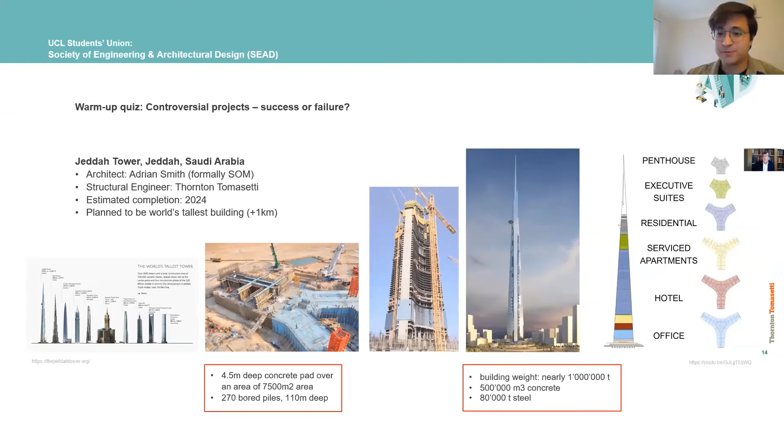Jose, do you want to add anything before we proceed? No, not much. I think everybody has expressed themselves, and I'm only going to throw more petrol into the fire if I keep talking.

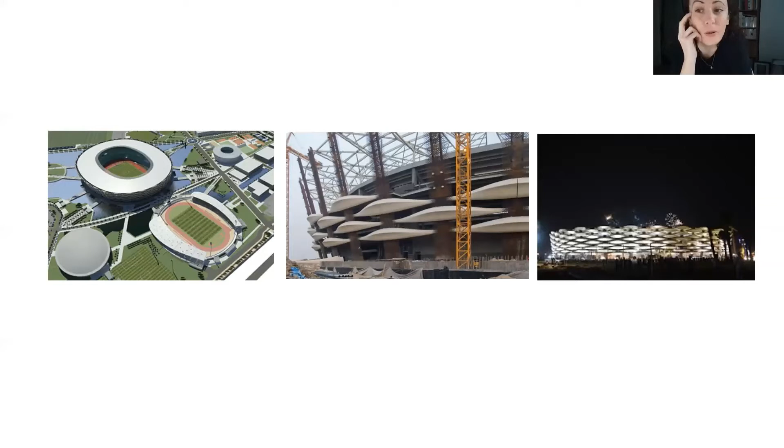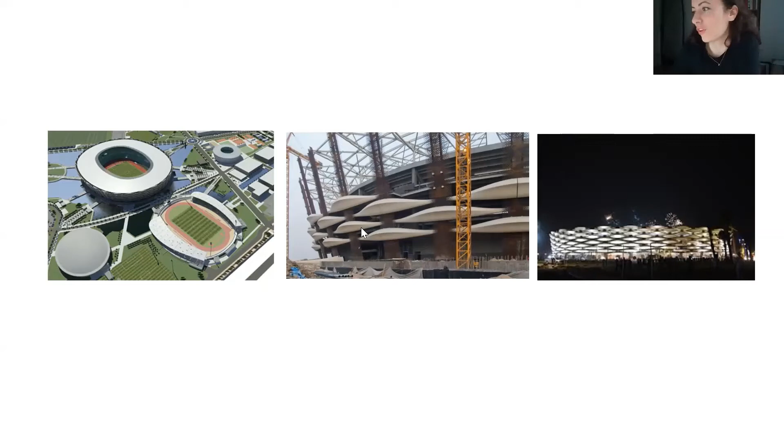In terms of talking about a project, I think you'd mentioned about talking about a project that we're proud of, that's holistic engineering or design. It was super difficult to think of one I was proud of, because it's totally cliche - almost every project you can have a bit of pride in for a different reason. That might be because it was my first project, the stadium, or the first one I had full project lead on, a CLT small domestic house.

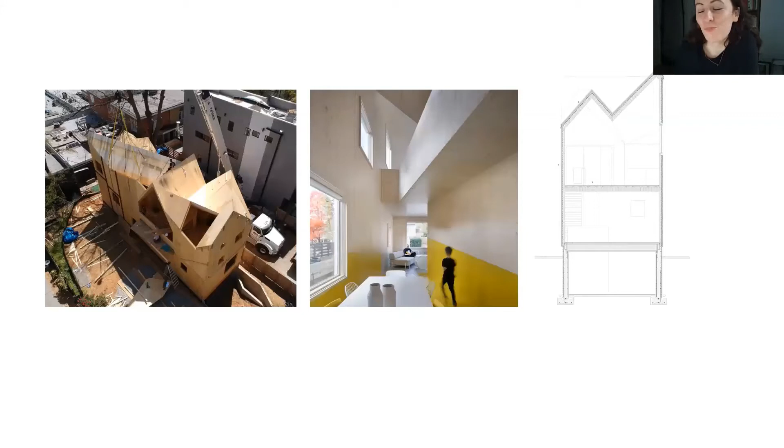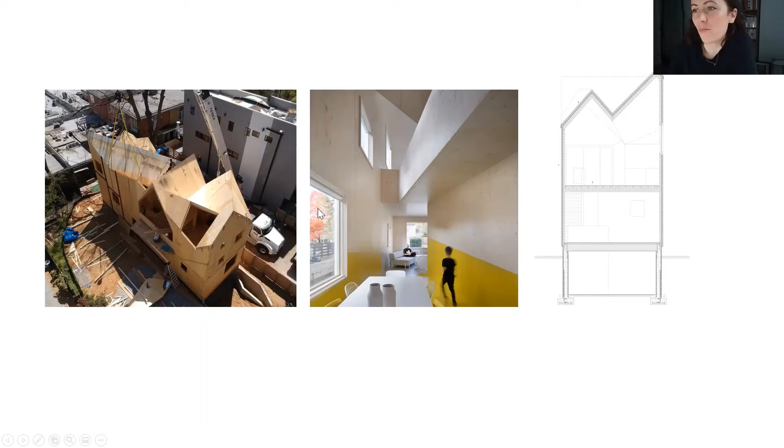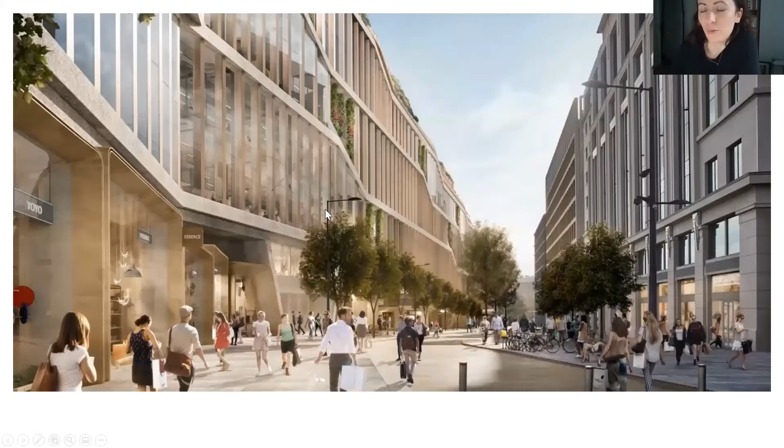So I ended up just going with one which had some principles of engineering I thought were interesting, but you'll all be the judge of that. It was also one that you could hopefully walk down to site or walk past and see - it's the headquarters of Google in King's Cross, which we were hoping to go on a site visit to see, but couldn't this year because of the virus.

The building, I think, can probably fall into one of those success or failure slides we could debate about. But from an engineering point of view, what's interesting about it, and hopefully what you'll find interesting as you walk past it - because you wouldn't be able to tell a lot of this just from the outside - is some of the way it's structured and some of the engineering that went into it.

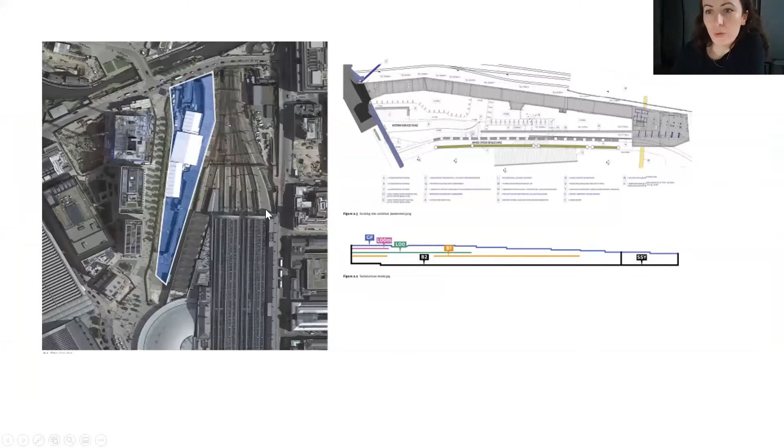This is just a section through the site. There's central cores for stability, and then it's made up of these 2D steel plane frames which connect through to the cores through the floor plates. In order to avoid any foundations near the railway line - some of you will have seen this before - the perimeter of the building is hung from a truss at roof level, and the interior side along King's Boulevard is also hung, forming this balanced cantilever.

That meant that the foundations near here, right by the railway line, wouldn't be needed, which would have caused some problems. This upper truss story level is where all the mechanical equipment goes for servicing the floors.

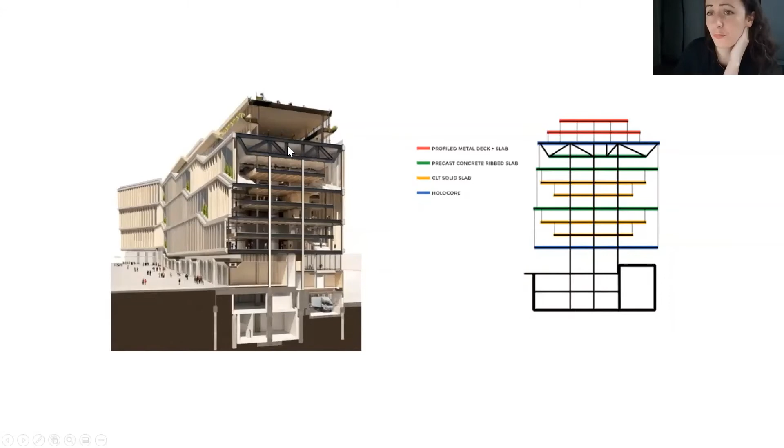It was interesting because the form of the building lent itself to very interesting client and architectural and servicing ideas. The floors are hung from the floors above, which provided theoretically a capacity for expanding the floors out to connect to the perimeter, or reducing them back where necessary. So if the client wanted to expand out the floors or office space, they could.

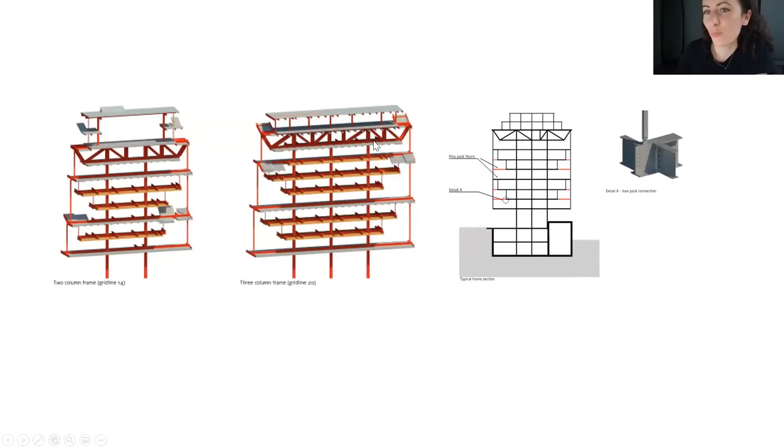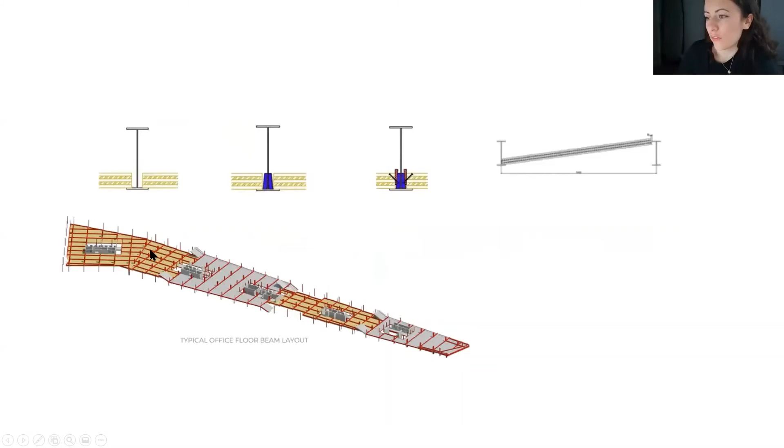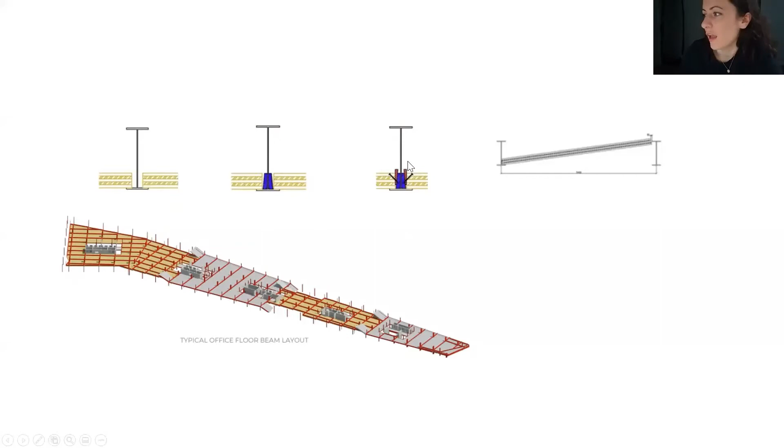But it would involve bringing CLT panels in, which sit on the bottom flange of the steel beams with the services running through the floors. There's a mixture of precast and CLT floors hung - the CLT floors are hung from the precast floors, with CLT being quite lighter. And all of the structure is exposed.

So here you can see from the underside, because of the way the services and all the servicing happens in the floor above, you can see all the CLT from below, and that's with these step backs to these hung floors - these kind of 3-story hangers.

With all of the elements and the structure being exposed, it's hard to convey how much time we spent - I tried to find my old notebook with all my sketches but couldn't find it - sitting with the architect and contractor figuring out every single bolt and steel detail which was exposed, and coordinating with the mechanical and environmental engineers at the truss level.

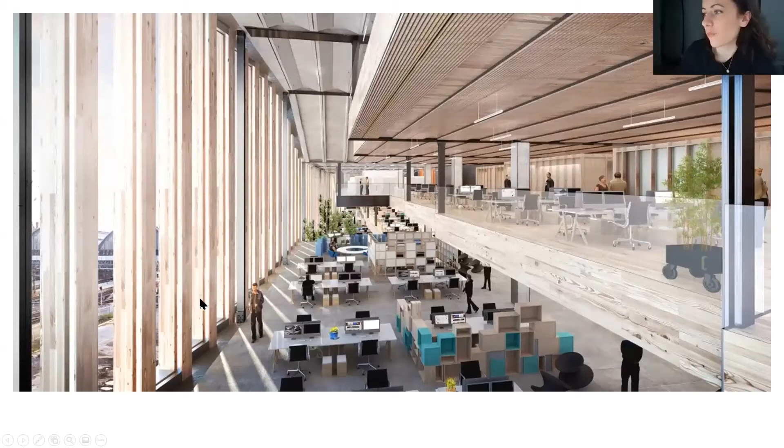So that every service ran through the trusses neatly and through the floors. This is an example of the plant room truss at the top with the hangers which drop down the side of the building.

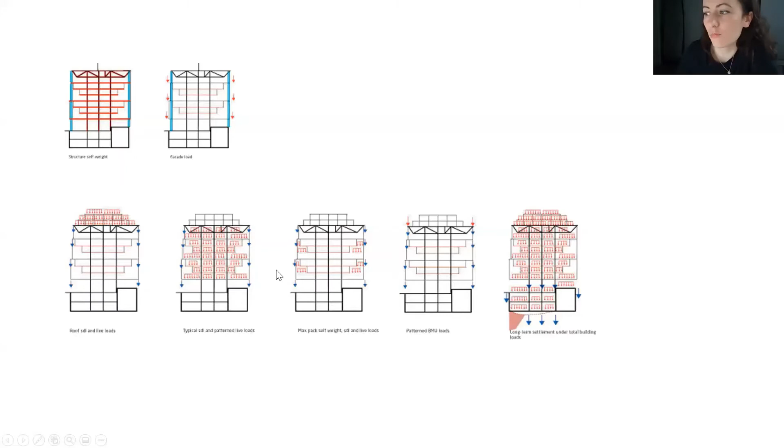We did a lot of work with the facade engineering as well, and the temporary sequencing of the project, because as the building is loaded, the hung floors would deflect and affect how the cladding is constructed, as well as how it behaves in the long-term use of the building. And if you walk down by King's Cross, if anybody can escape at any point, you can see the building going up at the moment.

And if you do manage to walk past it, you should be able to see, or try to pick apart and see how it's working.

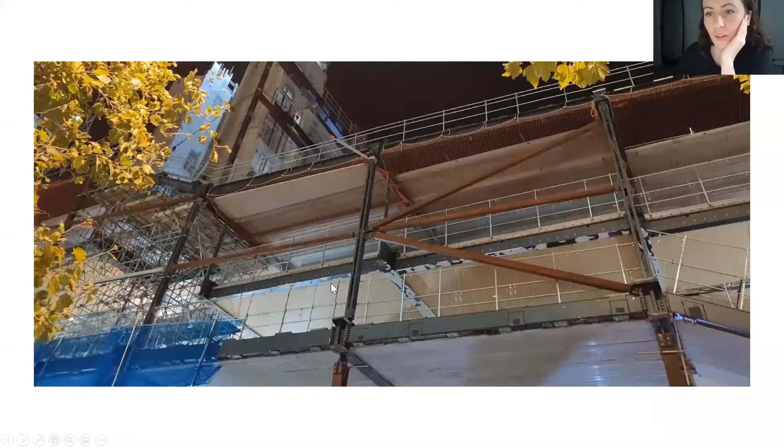Here, for example, is one of the hangers. At the moment it has temporary props below and to the side of it, because it's not being hung yet and needs to be connected up into the truss ultimately. This is to stop it buckling while it's being loaded as a column vertically.

And then you can see the CLT floors landing on the bottom flange of the steel beam, and all of these connections are going to be exposed here as well. This is an example of where the beam will come out and connect into the hanger to potentially infill the floor at a later date.

So I did that really quickly because I'm at 6 minutes, but I think the principles of the building were key to meeting the client's requirements.

And without the structure or the work that we did in the floor framing - CLT slabs on the steel beams, hanging it to avoid the network rail line - so much of what I see is directly influenced by our input at the start and what the building ended up being. To me, what is the architecture and what is the structure and how the building is serviced is hard to pick apart.

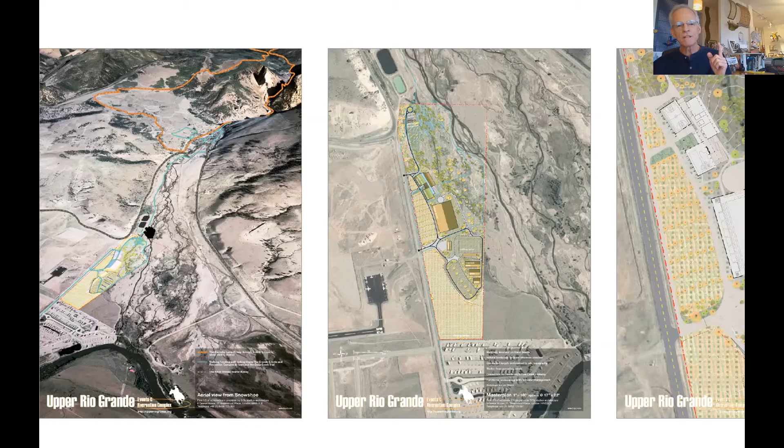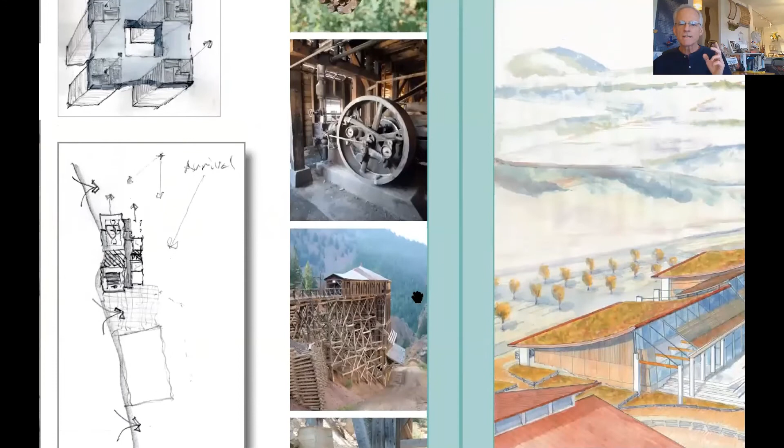46 acre events and recreation, American style fairground site. Trying to avoid complying with style imperatives, Western Americana if you will. How do you design in the mindset of a place? In this case, we were trying to find what is the mindset of an early settler: inventiveness of materials, perhaps intelligent use of materials, sparing use of materials, willingness to reuse materials.

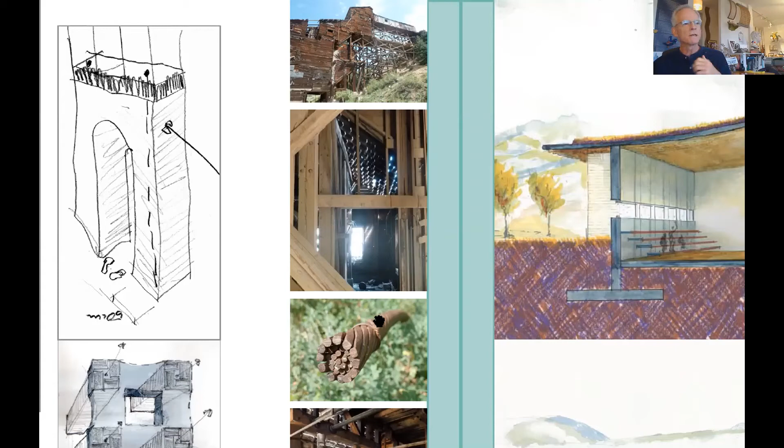So ball courts, community meeting rooms, swimming pool, continuation of Main Street as spine of the building, orientation looking north to the mountains, across the valley to the rising sun to the east on the right.

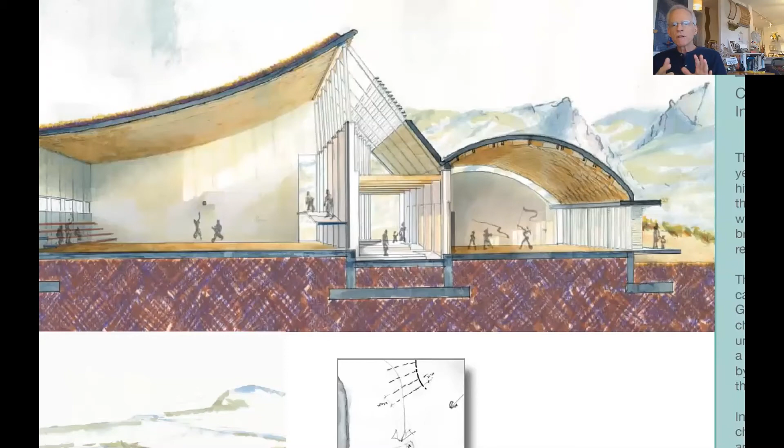For the ball courts, the larger spaces, suspending the ceiling, the roof, with repurposed cables from the mine, literally brought out of the mine, stabilizing the roof against flutter with a ballasted sod roof, which is a strategy that is prevalent in this part of the Upper Rio Grande Valley.

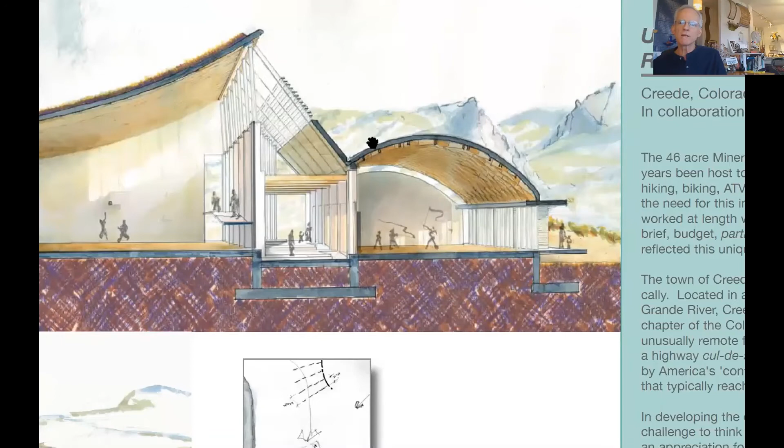Use of the system lamella barrel vaults, which I've done out in, built with the students out in Alabama. Structuring these: the mountains of Colorado now are 60% covered with standing dead pine as a result of a beetle infestation. I recently finished a structure from entirely harvested standing dead timber.

That was the aspiration for the side of the structure on the right there. It's a balance of tension structure meets compression structure. We enjoyed a lot of trying to figure out what do you do with these different thrusts. The outward compression thrust from the barrel vault, taken with this horizontal concrete beam that sits on a series of fin-like columns looking across the valley to the east, and what amounts to a series of blade-like columns resisting overturning moment.

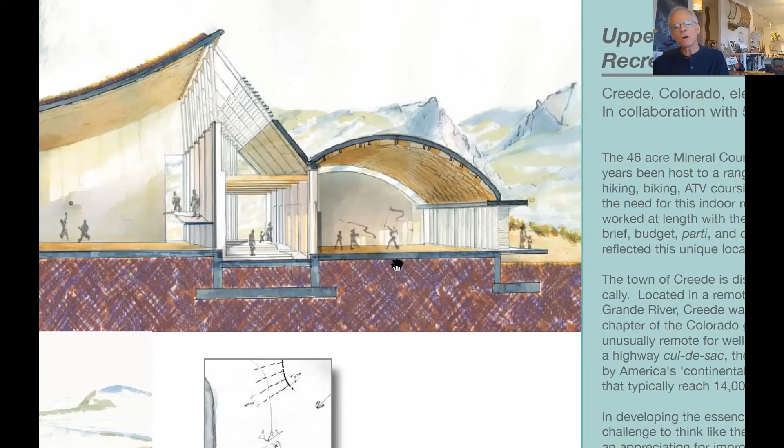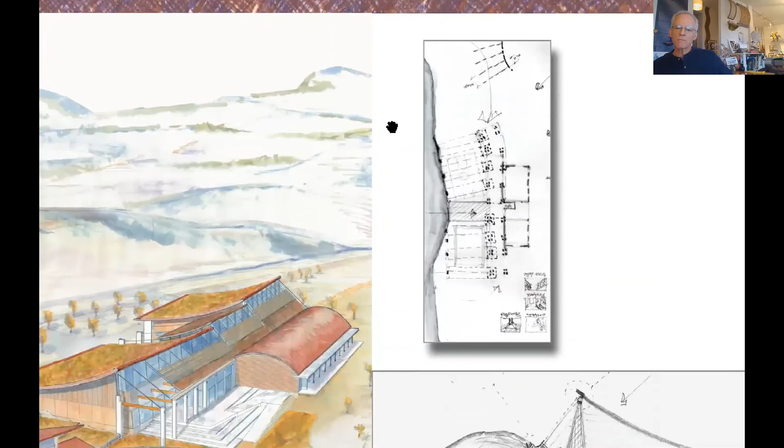A lot of morning sun. What can't be seen here: tension structures usually involve somehow getting the tensile force to a relatively tall height. How do you get that down to the ground? What can't be seen quite in that picture is this use of a trellis truss to not only take the loads down, but to help with the buckling that usually one has to deal with by taking a suspension support that high above the ground.

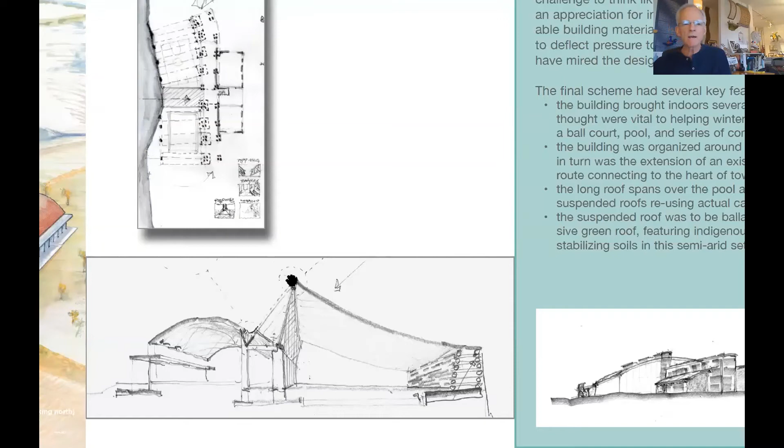I liked Laura's phrase about the principles of engineering. The building gave us an opportunity to use the principles of engineering as we were repurposing existing materials to be drivers in the form. I think that's it. Thanks.

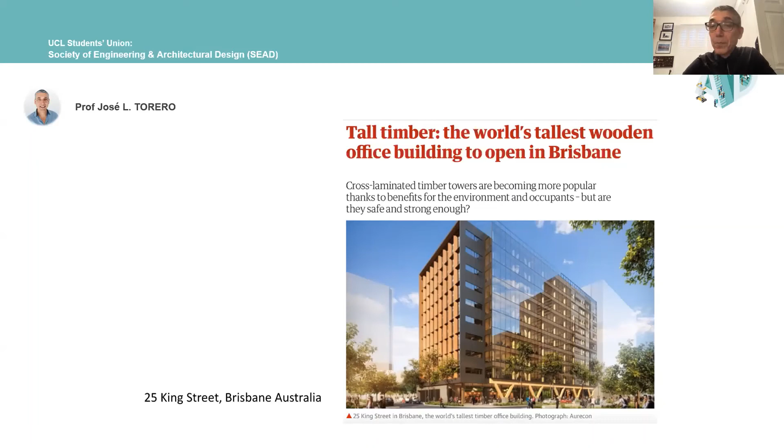I literally had to raise a scandal and engage with the fire brigades to try to boycott the final changes to the building, so that this component was dropped and the building remained clad in its original manner. So anyway, that's a story of holistic integrated design that, because of an imbalance of competency, ended up being a tortuous path towards a very non-integrated and unoptimized form of design. Thank you, Jose. And finally, Michael Woodrow.

And so initially I started specifying all the usual things: fire alarm system, exit signs, a second escape staircase, etc. And he looked at me and said, 'You don't know what a Maggie Centre is, do you? Come on, let's get in a taxi.' We literally walked out of the office, jumped in a taxi, and drove to the nearest Maggie Centre, which in our case was the Stirling Award-winning Richard Rogers Maggie Centre in Hammersmith. And that's where I started to learn more about the background, about what the building needed to be.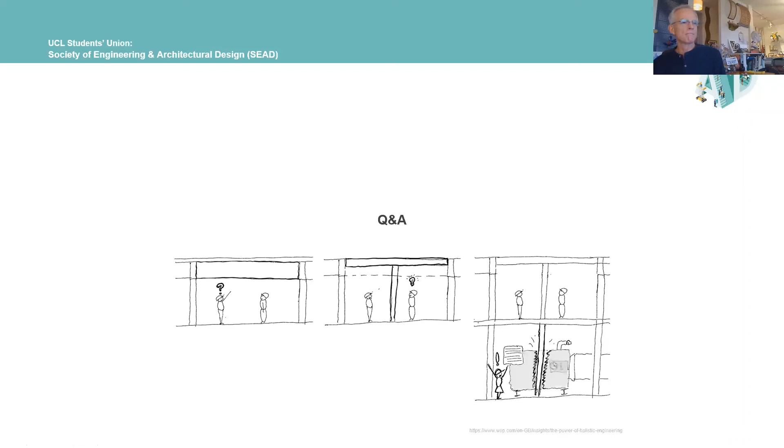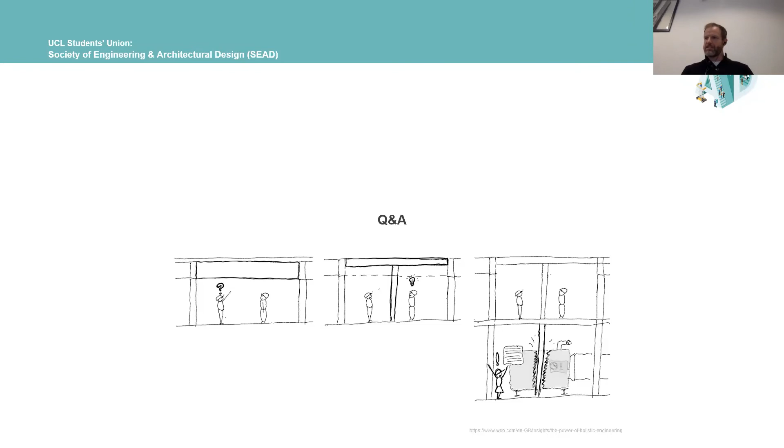Anyone else? I would agree with Anderson. I think drawing is a mechanism of communication, and one of the biggest problems when dealing with different engineering disciplines, architects and so forth, is fundamentally being able to communicate in a manner that's accessible to everybody. So sometimes a proper sketch or drawing goes very far in that direction. In addition, it's not just about communicating with others, it's also about developing your own ideas in your own head. One of the main things that helped me with, for example, the project we just saw, was being able to visualize the design long before it ever manifests in reality. You have to be able to visualize it, whether that's drawing or building a model or creating a 3D model, whatever it takes to visualize that design. You can't communicate to anyone unless you yourself fully understand what it is you're designing.

Okay, I think Laura might have left us. I think she just dropped off. Looks like her screen had frozen.

So if there's no questions in the chat, I think we're ready. I have one, I'm typing. Okay, you want to ask it? By the way, my signal went. Oh, I'm back. If nobody's asking, I'll just talk. Is that okay? As long as it's short, Peter. Okay.

Basically, I would like to ask the panel about the implications of an increasingly tight carbon budget that you can work with. Does this inspire thoughts of actually not constructing, and where does construction go after that phase? What are the implications of a shrinking budget on a project?